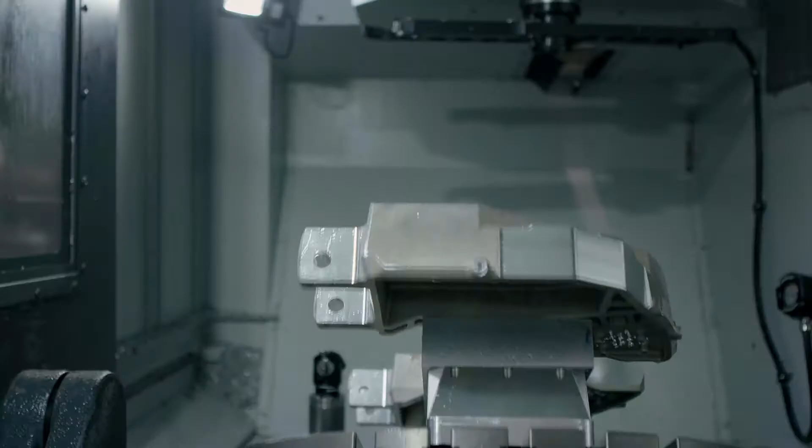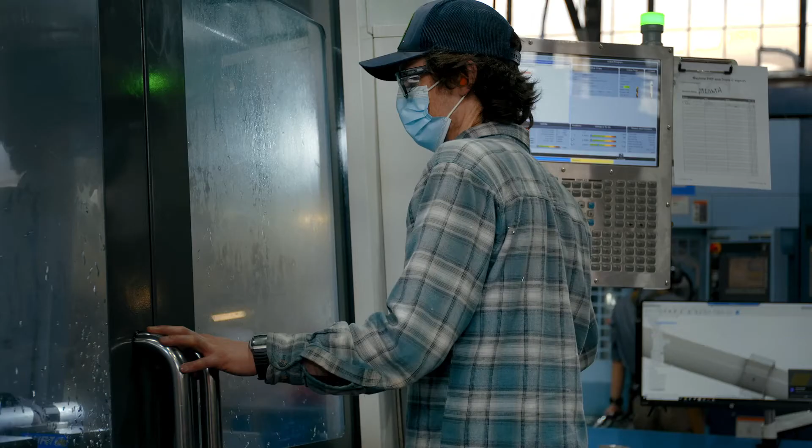We work with engineers that are trying to achieve very complex goals and make very advanced mechanical assemblies and components. What used to take a very long time to figure out, because they might have to go get a piece of material and start machining it to actually give that feedback, now we can virtually simulate so much of that.

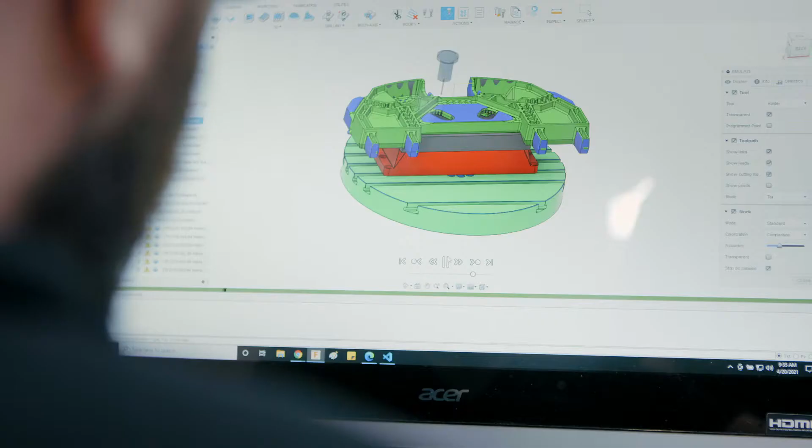As soon as they come to us with the problem, we load it into Fusion 360 and pull it up, and we can right away start looking at geometries, measuring different aspects of it, making slight changes, or starting to put it in our machines to see how it'll fit and how feasible it is, and start giving them feedback right away. What's really important about us having these kind of advanced tools is we can be so much more agile than what manufacturing used to be known as.

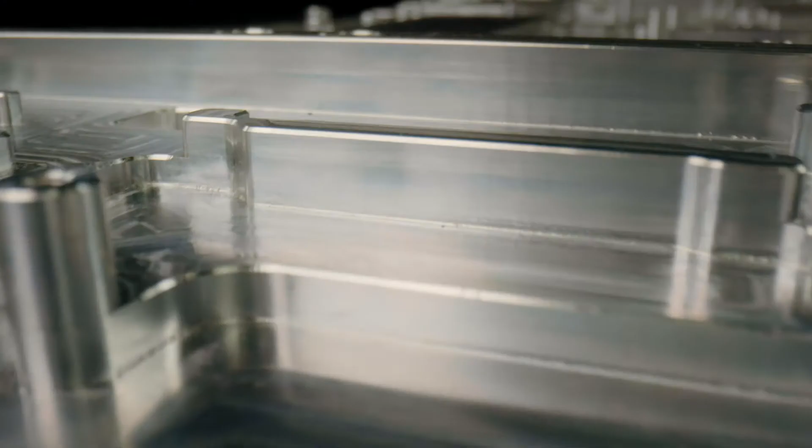A traditional job shop has few programmers and a lot of operators, so they program a handful of parts a week. We program a handful of parts a day.

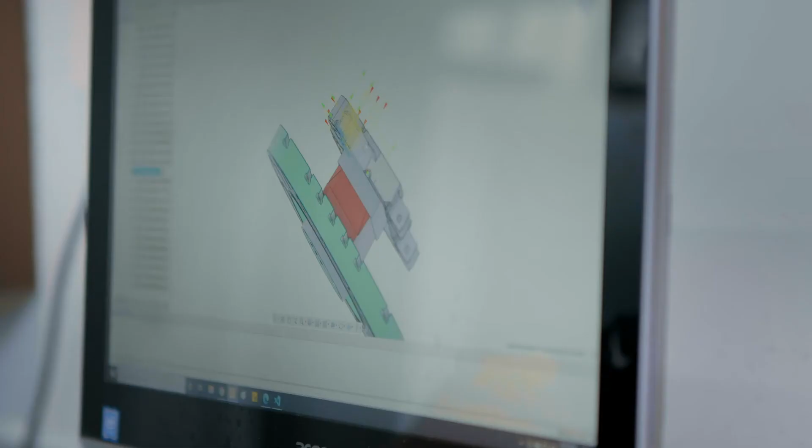The machining extension has collision avoidance and full 5-axis moves and everything like that. So it can really do some advanced stuff on the CNCs, like the steep and shallow tool path, which is extremely powerful. Right now this machine's doing our part alignment on this casting that I spoke about.

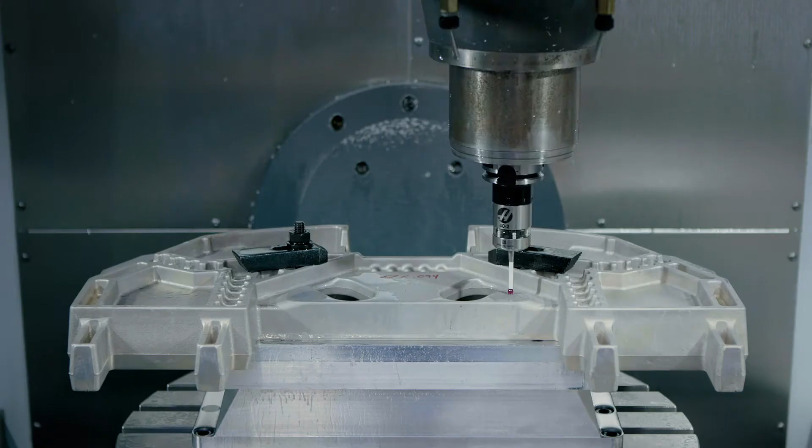Typically that would involve a lot of shimming the part and finding it and making it really flat, and it takes hours a lot of times. It's really stressful. With Fusion 360, the probe does all that work, so it's a huge cost savings.

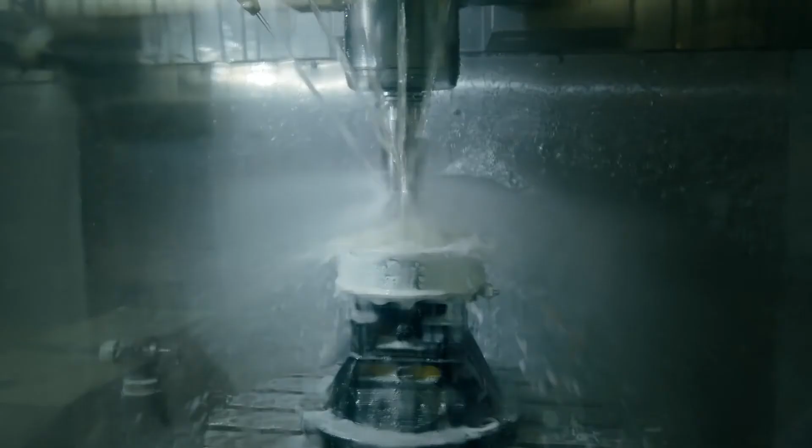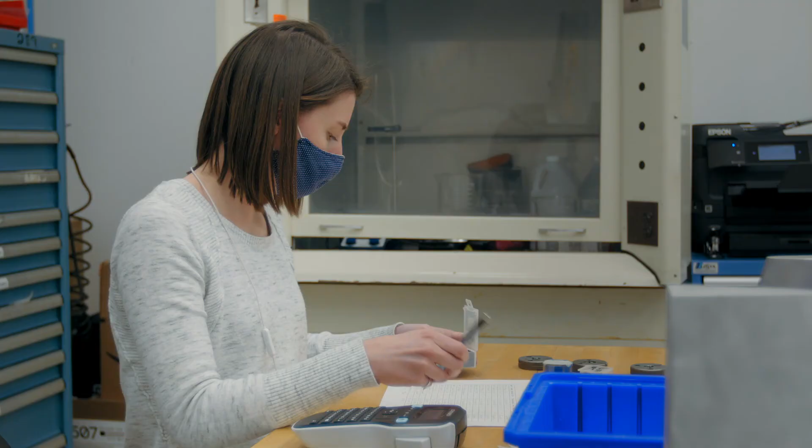We know everyone's on a tight timeline, and we make sure we're using the most cutting edge tools we can. That's why we're using Fusion 360. We can usually pass it from the shop floor to sales to even QC looks at it. It really embodies the whole agile movement that's in engineering, such a buzzword in that industry.

No one really thinks of it when they think of manufacturing. It was always the old waterfall methodology, but things are changing pretty quickly, and that's thanks to the advanced software we have, like Fusion 360, that we have access to now.